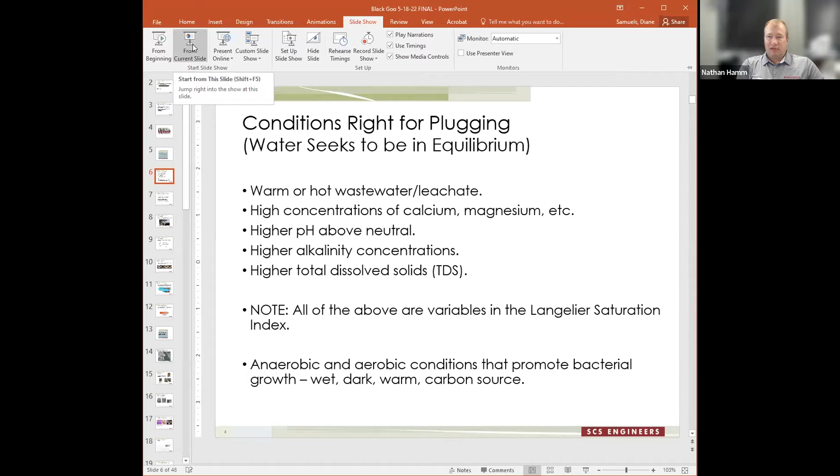So when we talk about pluggage versus relatively clear pipes, wells and pumps, etc., it's really all about the conditions that exist where the deposits occur or don't occur, hopefully not, right? Whatever those conditions are, though, your wastewater is chemically always trying to achieve equilibrium. You're familiar with deposits occurring in some pipes, wells and pumps, etc., and not in others, which pretty much we all are familiar with. Then you know that there's different conditions that exist between where deposits are occurring and when they're not.

So let's just take a fairly simple example at the start here. Think of conditions that exist in a water heater supplied with well water. Well water is being heated. You can have higher concentrations of minerals, your typical calcium, magnesium, iron, etc. Mineral deposits will tend to occur, but not usually any organic deposits in the water heater, right? That's because solubility of calcium decreases with increased temperature. There isn't usually a carbon source in the well water.

So part of talking about conditions needed for deposition to occur is a calculation called the Langelier saturation index, or we call it LSI, which uses wastewater data and can predict if hard scale deposits can occur. And wastewater conditions listed in the first 5 bullets here on the slide are most of what makes up the Langelier saturation index. The next few slides will go into some more detail regarding this.

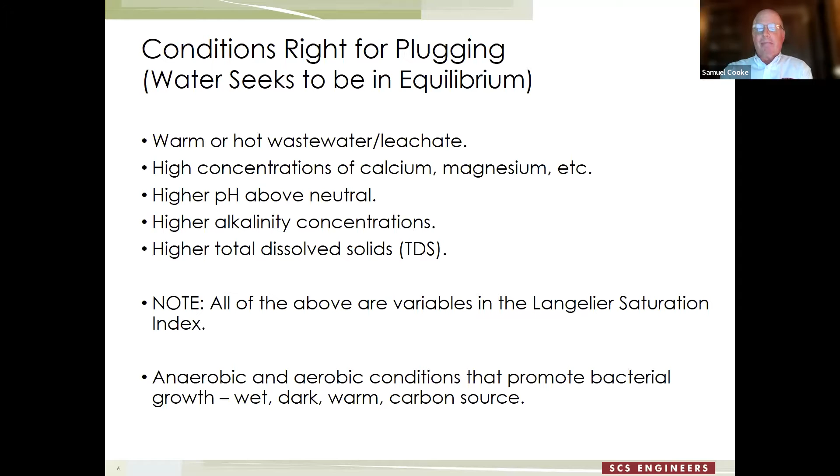So let's assume that the leachate or wastewater that you're managing has some of the conditions that can exist to promote deposits occurring in the pipes and wells and pumps. So based on what we know, based on research, wastewater like landfill leachate has some added components that further promote the deposits forming. Sticky stuff like man-made polymers that can be in landfill leachates and also landfill gas condensates, as well as polymer producing organisms are often associated with black goo deposits that Mark will be talking about.

We know that microbiological growth naturally produces polysaccharides. Want to also point out that landfill leachate and other wastewaters often have ingredients that form inorganic deposits. So we've talked about the calcium carbonate deposits in the water heater, but it can also be something called struvite. That's the magnesium ammonium phosphate.

And all of those constituents, the magnesium, the ammonium, the phosphate, are all typically found in landfill leachate, and under the right conditions, and by right conditions, I'm talking about really the wrong conditions, since we don't want deposition to occur, include all three of those constituents that, by the way, form in an equal molar ratio, 1 to 1 to 1. But calcium carbonate and struvite aren't the only inorganic compounds that can be a problem, because there's also iron and other inorganic compounds that also form deposits.

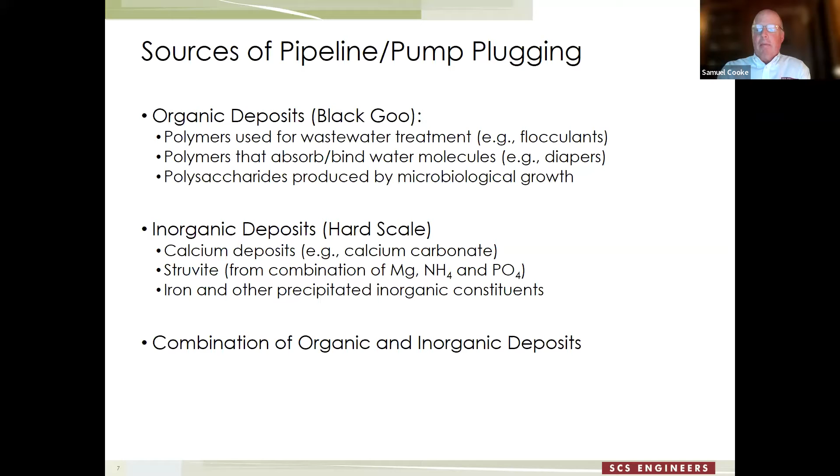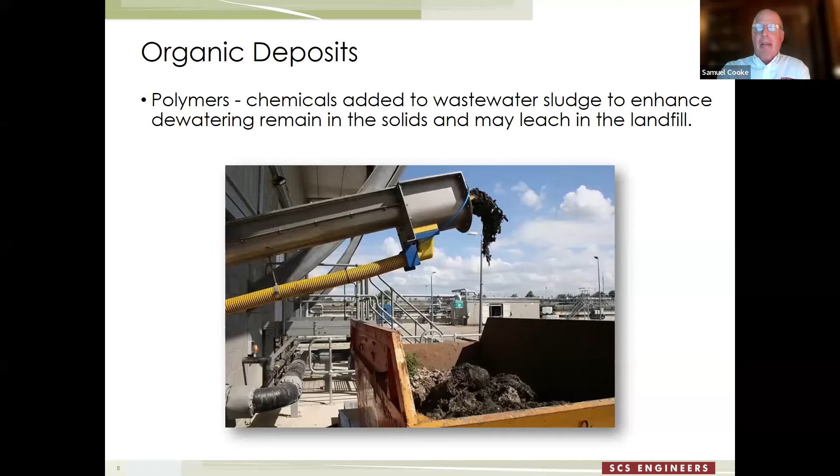Say I'm kind of going back and talking about these wastewater polymers, with the challenges that people are having with emerging contaminants, specifically talking about PFAS, a lot of times those biosolids from wastewater treatment plants have historically been land applied for beneficial use, as a disposal method. But with pending regulations, some states already enacting regulations, others in the process of getting that done and looking at what the federal government might do, it seems that more and more of those materials are going to be coming to the landfills potentially for disposal, further exacerbating that problem.

In your experience, do you need to be taking large amounts of, for example, wastewater biosolids to have issues with this, or can even just smaller quantities create problems with your leachate? Yeah, smaller quantities can definitely. I mean, the more that you have, the more chance that you're going to get those polymers in your leachate. But even at fairly low concentrations, the polymers and of course the polysaccharides that we're going to be talking about next, those tend to build up.

And again, it's all about that equilibrium and about the chemistry of your leachate and the conditions that exist in the pipe. And so you can have a relatively low concentration of one, but you have other factors that make it so that the black goo in the organic case or the inorganic deposits can build up. Again, it's all about conditions, and just a little bit of sludge can exacerbate that. So, good question.

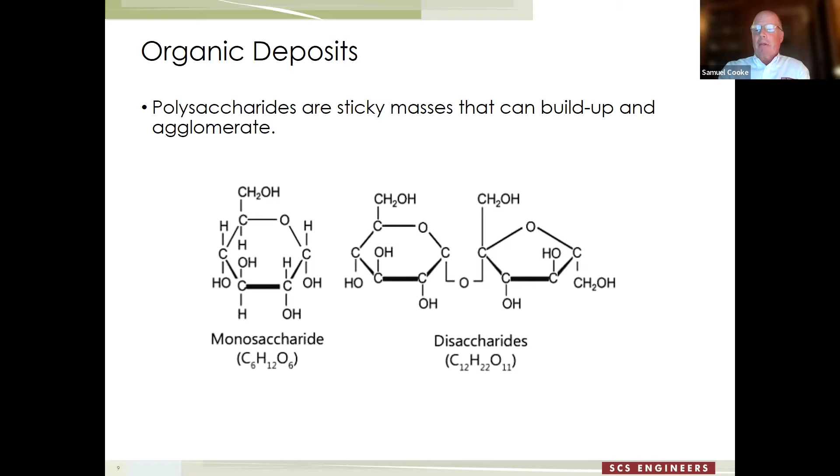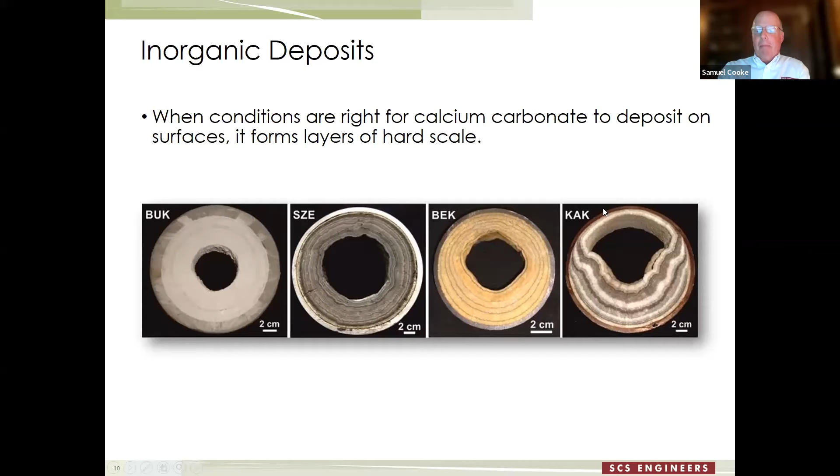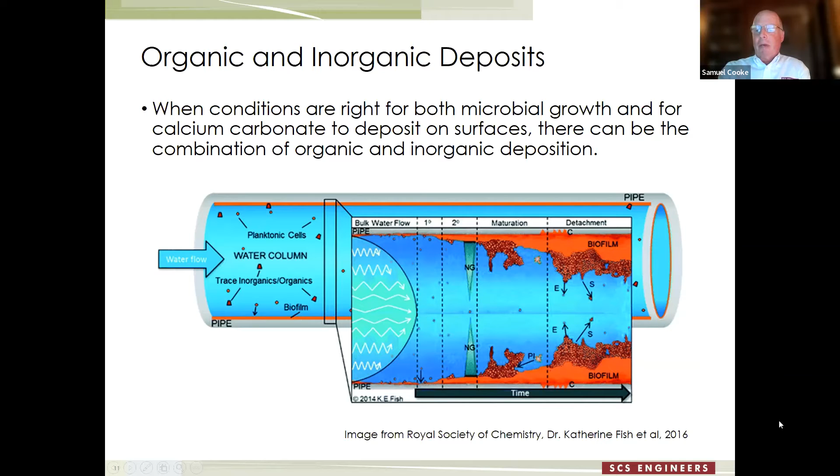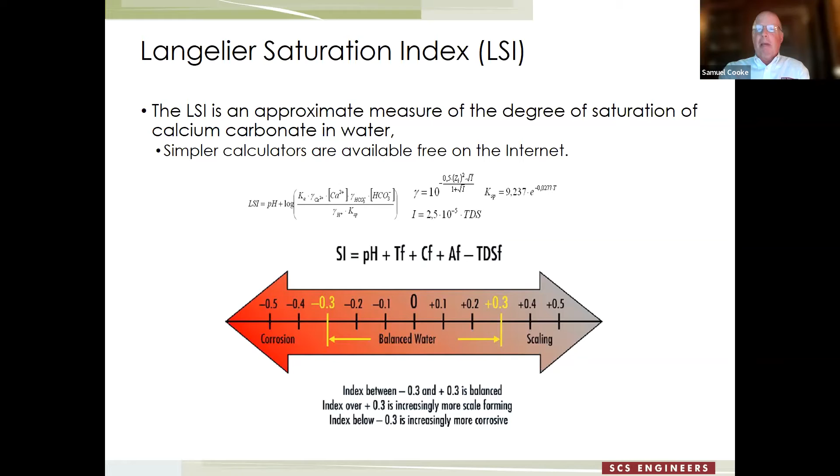Sam, I think it's important to point out that that's really only for that calcium carbonate scale formation, the inorganic scale, right, not for the biological or the black goo type stuff that we'll be talking about later in the presentation. Exactly. Very good.

All right. Thanks, Sam. That's kind of our scientific primer, if you will, of scale formation mechanisms. And that, I think, is a really good lead into a couple of case studies that are going to come up here. So I'm going to turn it over to Marc Lefebvre, who's going to talk about a very challenging inorganic scale site.

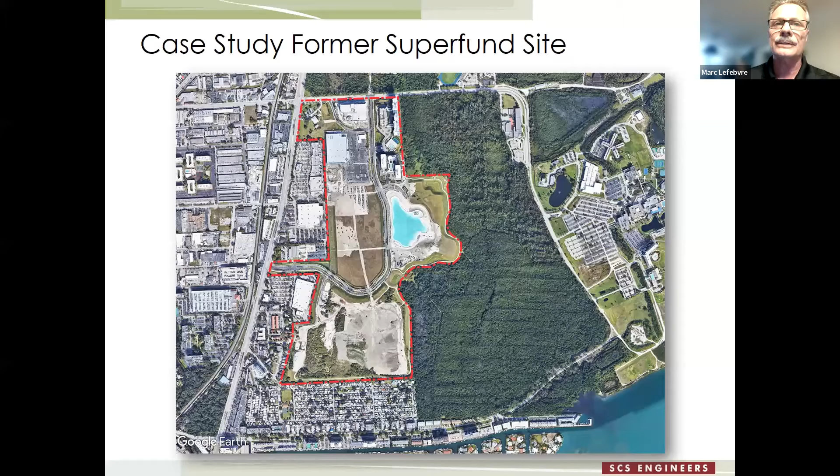We face a number of challenges at this site. There are 32 independently operated extraction wells to recover ammonia in the leachate impacted groundwater, but drawdown in the wells must be controlled so as to not exacerbate chloride concentrations in sensitive wetland areas.

SCS must maintain these wells to operate 24/7, 365 days a year with minimal downtime. Several years ago, scale deposits began to appear and have progressively worsened, causing some of these wells to be inoperable for extended or even indefinite periods of time.

Standard practice in many landfills is to conduct acid cleaning and jetting to remove scale deposits. We have performed this periodically at the site, but the scale comes back very quickly and is difficult to perform due to small diameter piping and few cleanouts.

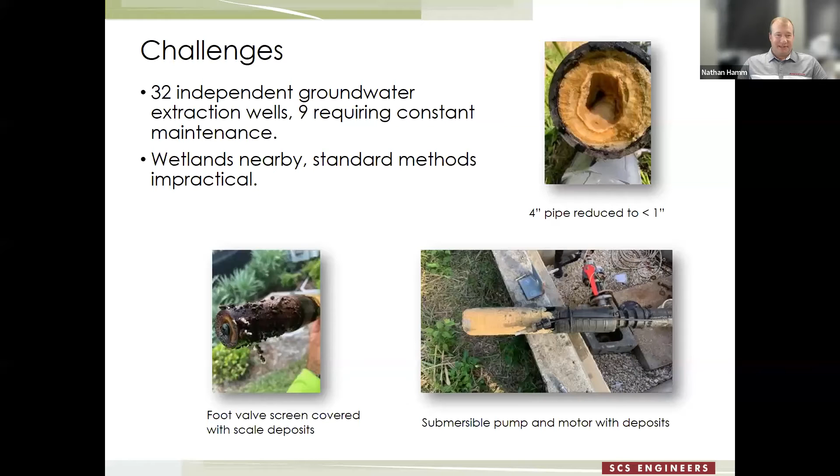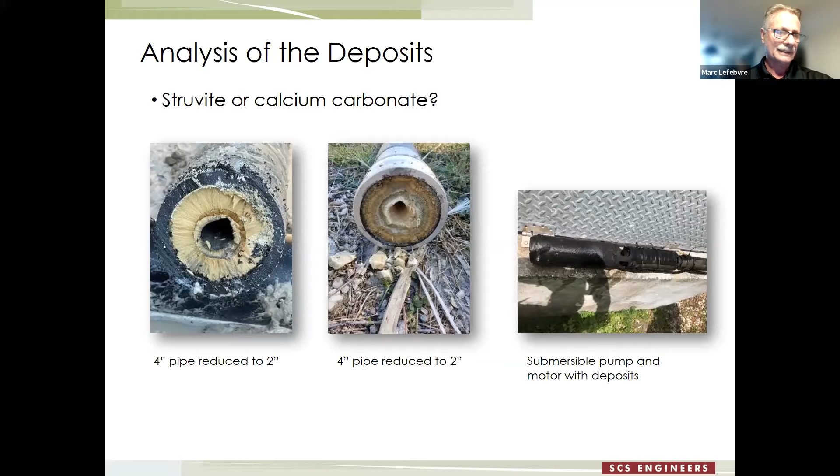In order to tackle the problem, we need to find out what these deposits actually were. There was conjecture early on that it was struvite, which is magnesium ammonium phosphate, as Sam mentioned earlier. Or were they calcite, which is calcium carbonate? Deposit samples were collected from all the scaling wells and analyzed by polarized light microscopy. When we received the results, the samples indicated they were calcite with a trace of quartz present.

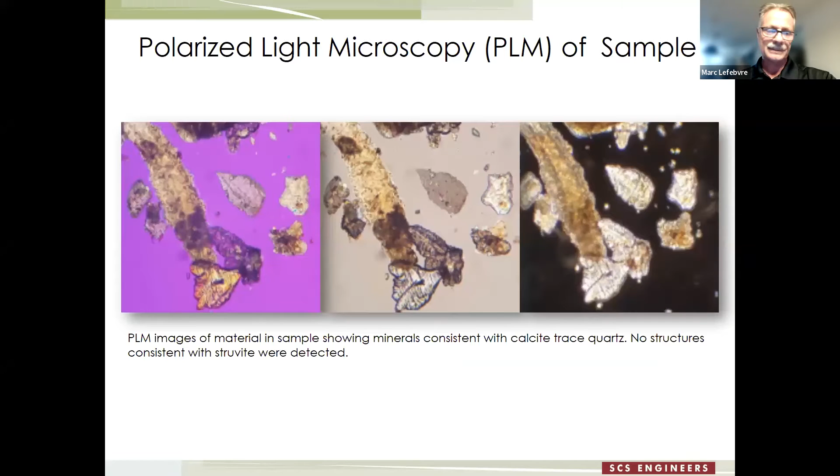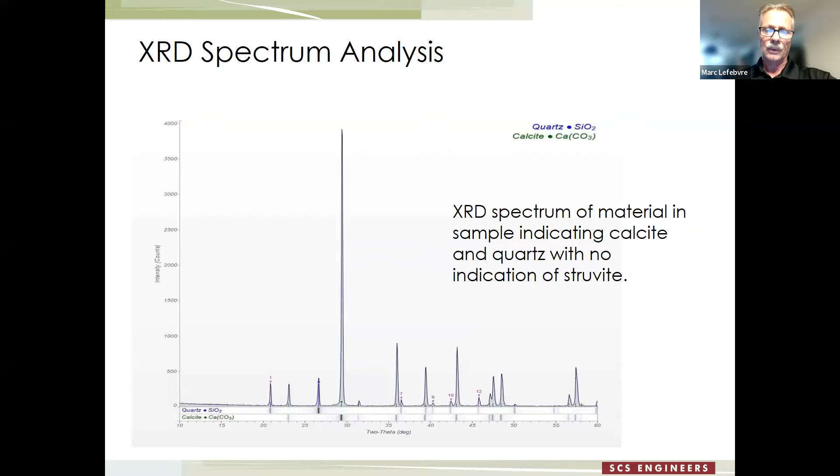This was further confirmed by X-ray diffraction, which also indicated quartz and calcite, but predominantly calcite. We also collected water samples to measure the scaling potential using the Langelier index, as Sam discussed earlier, at wells that both had severe deposits and no deposits.

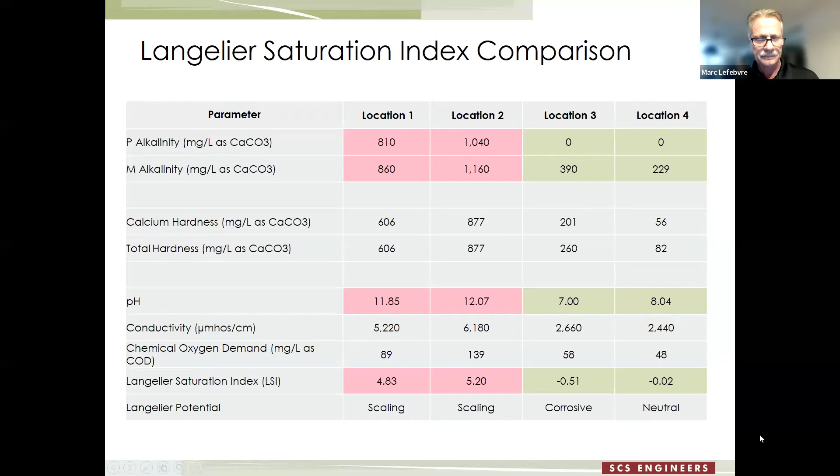So why were things changing out here all of a sudden over several years? All of the extraction wells were through waste, but only 9 of them have scaling problems. So what is buried here is the question. Looking at historical aerial photos, some of the lakes were filled with crushed concrete. That would explain the high alkalinity and pH at some locations.

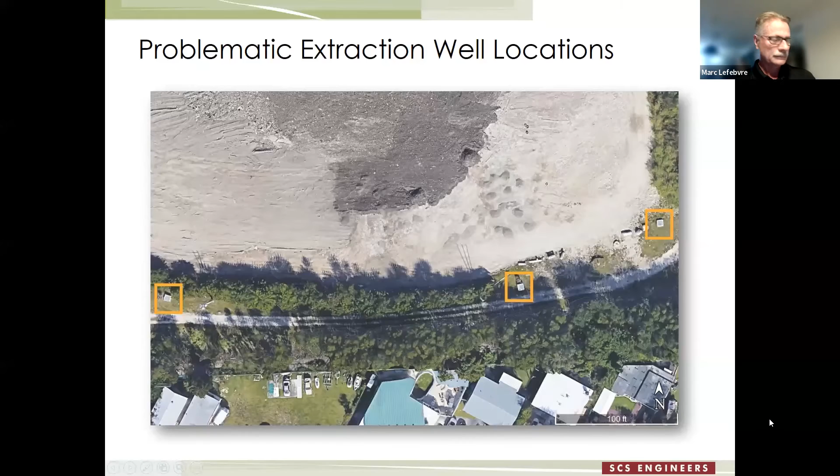Since we tried acid cleaning and jetting with limited success, we embarked on pilot testing some potential proactive technologies to prevent scale. The criteria for success was as follows. It needed to prevent scale on the well screen. It needed to maintain system pressure. It needed to maintain well drawdown and flow rate, and it needed to be cost effective and sustainable.

We have attempted to use other types of pumps out here. These particular submersible pumps are difficult to remove for maintenance. So we did try using some surface mounted pumps that are easy to maintain and relatively easy to monitor any scale buildup. So we have two different types of pumps at this site.

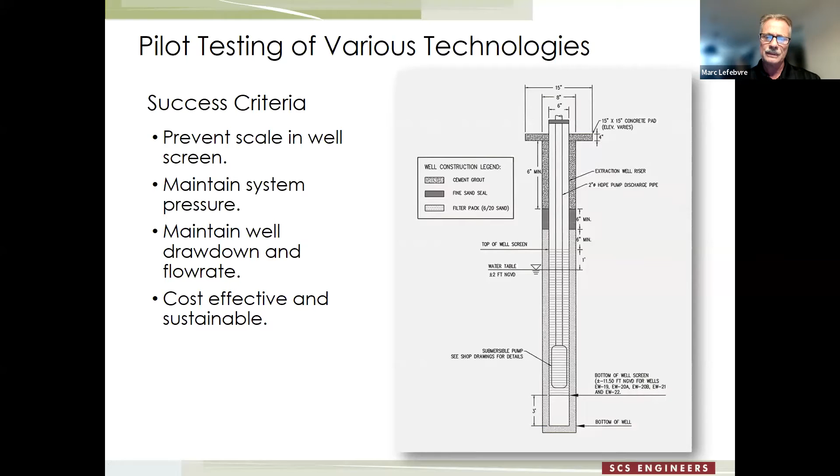The first pilot test we conducted, we'll call the EM device. Pads were applied to the pump and piping down the well to produce a magnetic field around these features. This testing was performed over the course of 1 year due to scale blockage downstream. When scale was produced on the pump, piping, or well screen, the pads were repositioned and additional pads were later added. A Gauss meter was used to confirm the presence of the magnetic field.

It appeared based upon our testing over the 1 year period that the treatment was effective at preventing scale at the pump intake, but the magnetic field radius of influence was not great enough to prevent scale in the well or in the downstream piping. Many more additional pads may have worked, but that option was deemed cost prohibitive. It was our collective opinion that this was not a good fit for this extreme case of scale, so we discontinued the testing.

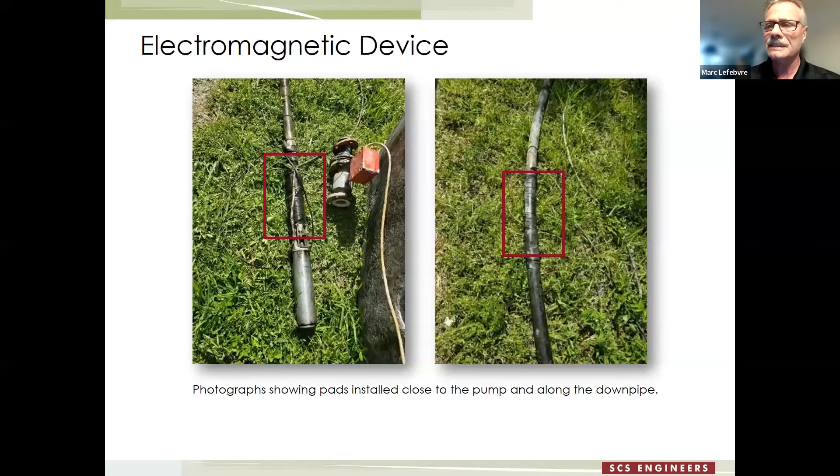The next pilot test we attempted to use was the electrolytic system, we'll call it that. This was a proprietary technology and the second pilot test conducted. An initial chemical treatment was applied to the extraction well using a weak acid and oxidizer to stabilize the well. A continuous low amperage DC current was applied to an electrolytic flow cell to ultimately change the water chemistry and to modify the charge on the ions that produce scale.

Multiple iterations using different metals and multiple flow cells were conducted over the course of a 4-month period. Even after all these iterations, extreme scale deposits continued to appear on the foot valve of the pump and on the well screen. Based upon these results, this technology was deemed ineffective for the extreme conditions of this site, and this testing was also discontinued.

The next pilot test involved chemical treatment. We used a conventional scale inhibitor for prevention of scale in heat exchangers or condensers, and it was tested over a 4-month period in a heavily scaling well. The dosage of chemical was based upon the stoichiometry and concentration of scale-producing ions in the groundwater.

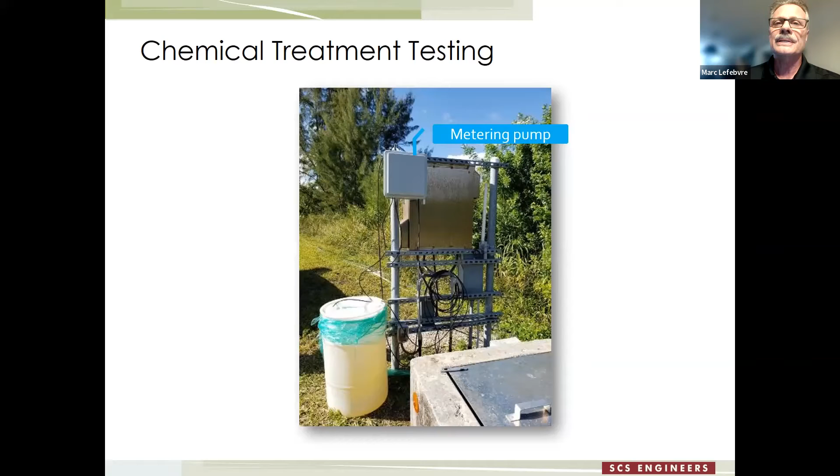The results indicated that the scale was not prevented, but the composition of the scale was changed from a hard rock-like material to a soft sandy consistency that could be brushed off relatively easily. The volume of soft material was still great and would still need to be removed from the pump and piping, so this was also deemed unsuccessful.

Currently, we are conducting the fourth pilot test, and this is a proprietary chemical formulation. It's a well-specific formulated scale inhibitor, and it's being tested in one of our most challenging wells. This testing began about 2 weeks ago. Preliminary indications are that no scale is formed in the well, pump, or piping after 2 weeks, and all the criteria that I mentioned earlier are being met for pilot studies. SCS will be providing updates on this testing, and the final outcome will be available on our blog.

So Mark, you show a picture of some above ground hose there. Why above ground hose? You kind of referred to that earlier. Yes, we have HDPE piping throughout the entire site, but this particular one is in a section of the property that has very extreme scaling. This is the area where we're doing our pilot testing right now, and that pipe is plugged solid.

We've tried to acid clean that and jet that to no avail. We really don't have enough clean outs. I can only imagine the piping must be hundreds and hundreds of feet with maybe less than an inch of clearance through there.

So what we did is we installed this hose as a bypass, and that bypass allows us to also monitor the effectiveness of our pilot test, because we can disconnect sections of this pipe, which are connected in 50-foot sections with cam locks, and we literally observe the interior of the pipe and see what kind of deposits are present. We can even step on the pipe to see if it's crunchy, if anything's developing there. So this was kind of an alternative to excavating that HDPE and replacing it. So it's worked out really well as far as evaluating some of these technologies.

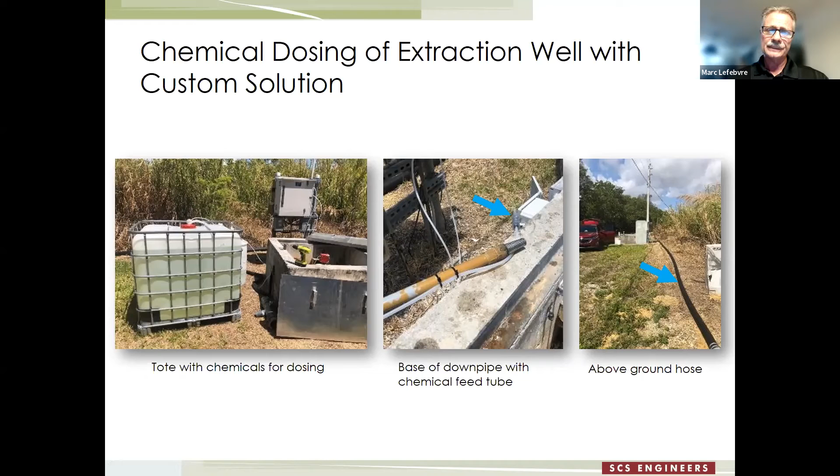That's exactly what I saw. I like to see about 250 feet per clean out. Makes it a lot easier to troubleshoot, video, inspect, and maintain. It just works out a lot better that way. It would be nice to put those in during the development of the landfill. It's sometimes much more difficult to retrofit that, as we experienced at this particular site, if that's possible.

So if this final fourth test that we're testing right now doesn't pan out, we have some additional potential options I'm going to mention. One of them that we've discussed is injection of an inhibited acid such as sulfuric, for example, for pH and alkalinity reduction. Some of the concerns associated with handling an acid like that would be attacking metals in the system, undesirable gas generation from reaction with different types of products that have deposited in the piping, formation of undesirable products directly like gypsum, which is calcium sulfate, potential public access issues, and health and safety concerns.

Another candidate study that we've also partially embarked on is relocation of candidate extraction wells to locations with favorable Langelier indices. This particular option would require groundwater modeling to ensure no adverse drawdown effects to sensitive wetlands and still effectively capture the ammonia that we're tasked with doing. As a note, we have done some preliminary testing of alternative locations already, and some of these look promising based on the groundwater samples we collected for Langelier indices. But in general terms, for this particular site, the farther away we are from the buried concrete, the better.

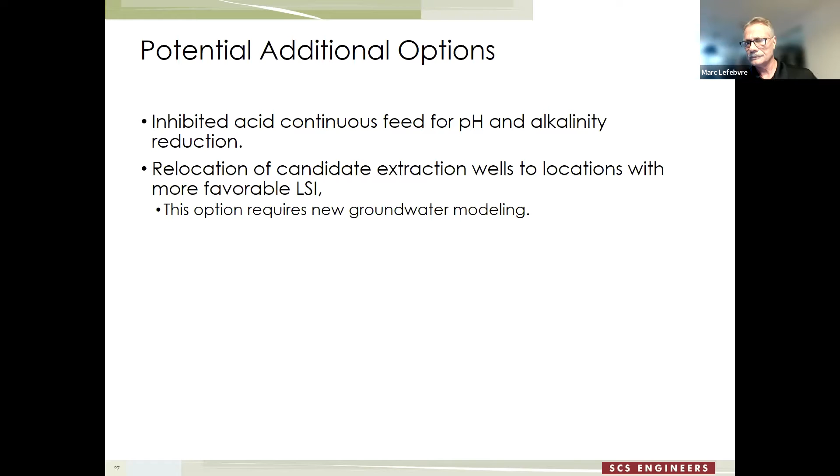Thanks, Mark. Hey, we've got a couple of questions up here, and I'm going to maybe ask those. We'll take kind of a quick break here to answer these questions before we move on. One of the questions I'm seeing here is, are you seeing benefits further down the line with acid introduction? And I don't know who's best to take that one on. Maybe Sam, your thoughts on acid introduction and its benefit as you move down the line.

So first of all, I would be very careful about making the decision about that, given the health and safety concerns that Mark mentioned. I've been to the site with Mark, and with public access, with the degree of buildup that occurs in the hoses and the pipe, and the amount of reaction that would occur with the calcium carbonate, because it's an exothermic reaction. There's a lot of foaming and fizzing going on there. So you have to take all that into account.

But like we said, if you're dealing with inorganics, the Langelier saturation index, the first variable there is pH. So the lower the pH, the lower the Langelier. There's also the alkalinity. So acid is going to help you out in those situations. And then it also oxidizes organic material. So there would be an effect. I guess the key thing that you're going to get out of this entire presentation is that every site is different. Every deposition issue is going to take a certain approach that will probably be more successful than other approaches. And acid is definitely one of the approaches. Okay, I think maybe that answers that question.

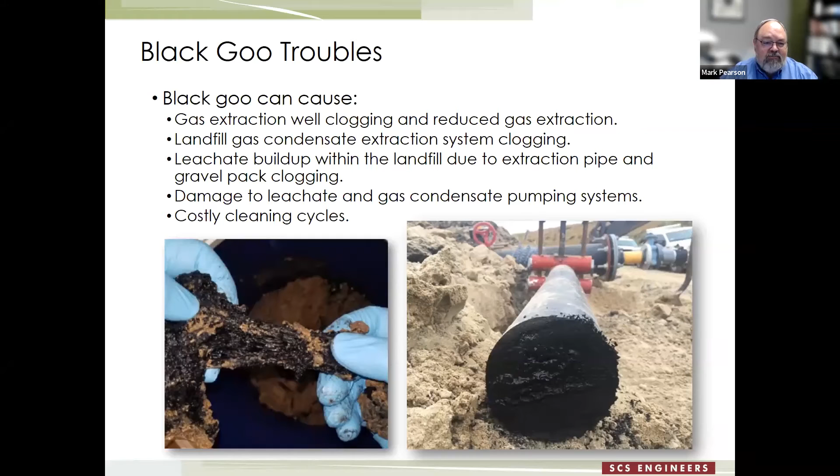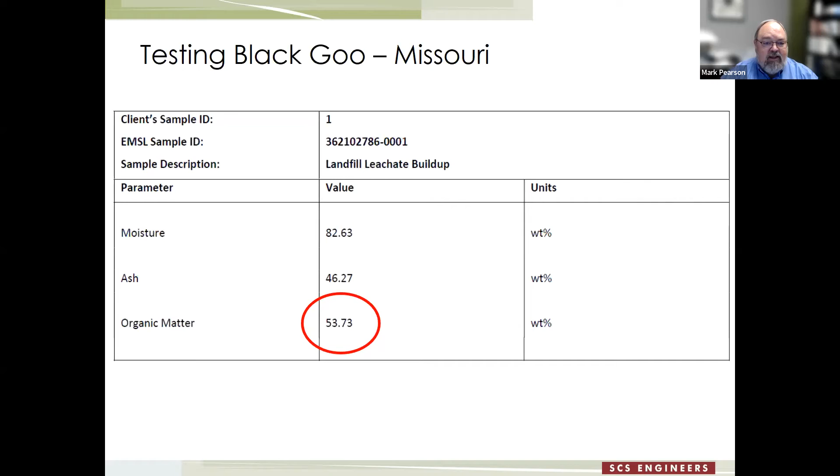So what is this stuff? We took our sample in southern Missouri to the lab and found that it was a majority organic matter, which sort of corresponds to what Sam was discussing about the polysaccharides and the infestation of microorganisms that produce this gelatinous formation that helps to plug up all our piping and underdrains.

And with the methods that have been utilized to remove this material, if you don't have access to places, it makes it really hard. And if you only have one tank, for example, like a frac tank or an enclosed tank, and it gets clogged up with material, then it's hard to take it offline long enough to get the material out of there. Furthermore, we have a lot of pipelines that are affected, force mains and such.

And certainly you can go in with a jet or a cutter. You may be limited in reach, and you may have to cut in more access points to be able to physically get at it. But the reality is, if this material has grown into your gravel pack under your landfill, you're going to have a very hard time removing that with a mechanical cleaning regimen.

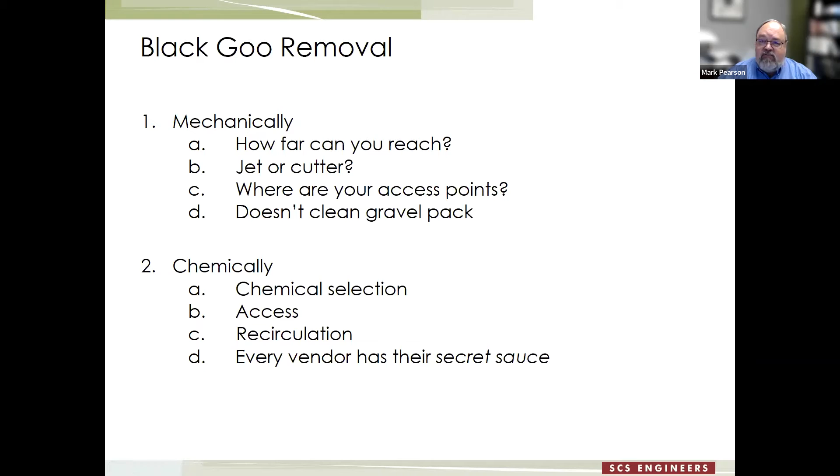Chemically, you can take your samples of material to people and see if they can find something that would help attack this and loosen it up. Again, you need access to apply chemicals. You need to be able to recirculate the chemicals, because with one pass, a lot of times the chemicals don't have time to react with the product, loosen it and then let it go. Every vendor has their secret sauce. So how do you figure out what to do?

We took samples of the black goo at our southern Missouri landfill and tried some materials that were on hand as a first order testing regimen. We had some proprietary material that seemed to liquefy the black goo. We tried low dose hydrogen peroxide, and that seemed to make quite a reaction. At that dosage, we didn't see a lot of reduction, but we could tell there was something going on there. Simple Green we had on the shelf, and we didn't see much of a reaction.

And we had a cleaning dose of muriatic acid. Again, we saw some reaction there, but our concentrations weren't all that high. But we've seen a lot of municipalities and clients send samples to labs, have them perform testing and come back with proposals based on that, having a competition that may be economic to begin with, but also to see how efficacious it may be, to help come up with a decision.

So what was interesting, Mark, at that site, looking at those samples, you had oxidants and acids that worked to some extent there. Some of those may be attacking the inorganic. For example, the acids may be more effective at attacking the inorganic than the organic portions, while the oxidants may be the opposite.

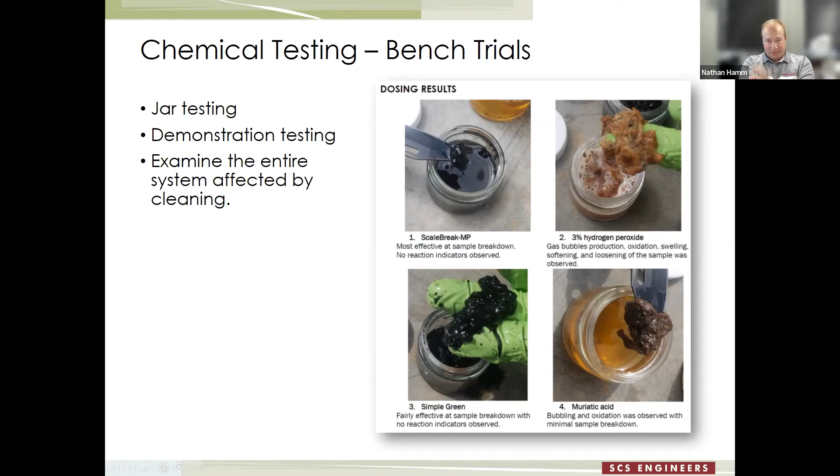When it comes to chemical cleaning, if you embark upon a program of cleaning your force mains or your underdrain systems with chemicals, it's probably a good idea to have the professionals do that as opposed to trying to provide all the safety measures that are associated with getting your person up to speed. And recognize that you have to employ system thinking in a cleaning protocol. For example, you're going to be releasing a lot of pent-up leachate that may be there because you can't get it out of your landfill.

It's been accumulated. So if you go and get your pipelines clean, now you have this rush of liquid, but you haven't cleaned out your tanks yet. So you might want to employ some system thinking in that regard. That and material compatibility. You may have valves that have gaskets or seals, and pumps and piping materials, maybe air relief valves, for example, that may have materials that would be affected by the acids or the hydrogen peroxide or other chemicals that might be utilized. So you might ask your chemical suppliers to take those things into account, or proactively replace valves in a cycle so that you're in a better position to routinely perform this kind of activity.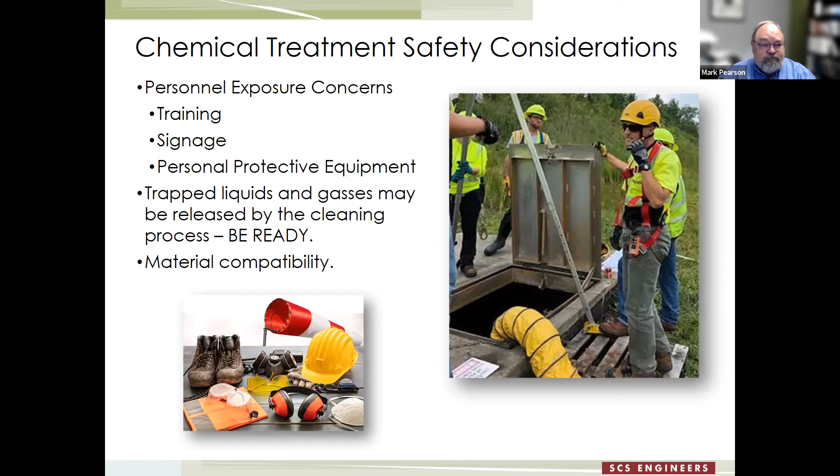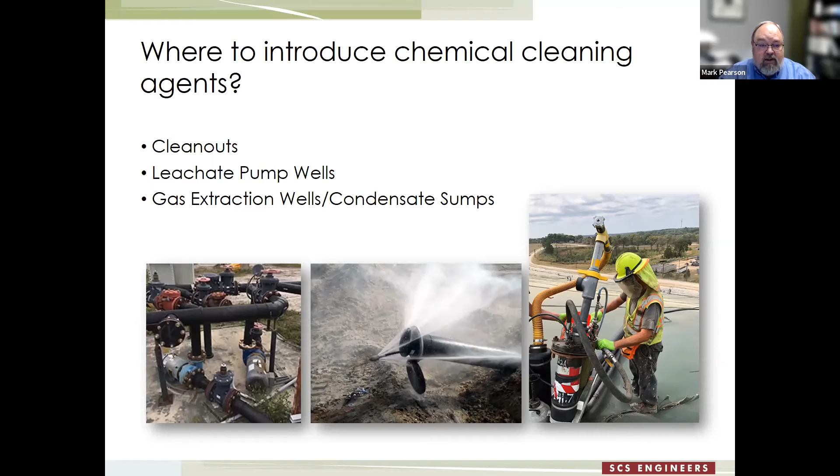Where do you introduce this stuff? You probably have limited spots. You might have cleanouts or leachate pumping entrances, access. You have your gas extraction wells and some pumping facilities for your leachate management. These are all opportunities, but you'll need to think about how you get this material in and out of your landfill systems. I think, proactively, we need to be thinking about that more as we see this occurring at more and more sites and becoming a more common problem. We definitely need to be thinking, from a chemical standpoint and a cleanout standpoint, about more cleanouts, more access points, those kinds of things that provide you options.

There are some landfills where you may only have access at one end to your entire perforated collection system. That makes it very difficult when you're at the downstream end trying to introduce chemicals to the far end of a line to clean it. It really limits your options. And the ability to get into the underdrain system. We found that sometimes you have carbonate and non-carbonate materials in your underdrain, and if you dose a lot of acid in there, you may actually be dissolving your underdrain gravel system. So that's something to keep in mind as well.

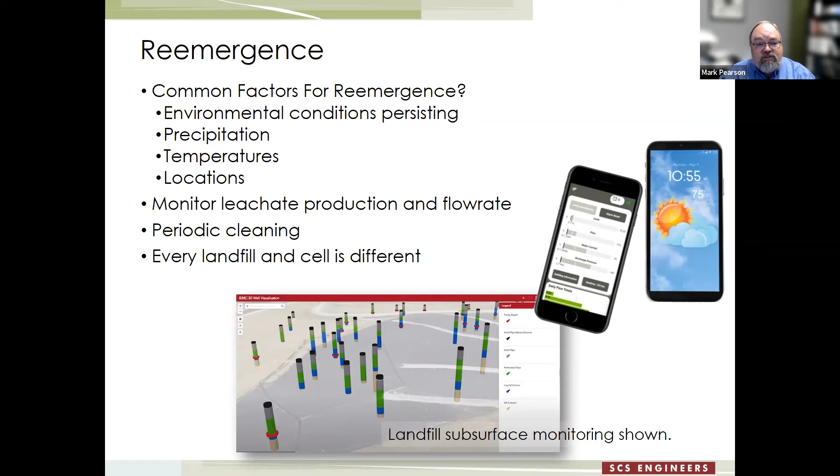I would suggest that if you're planning on doing improvements or adding a cell, that you discuss this not only with your maintenance people, but also with your chemical cleaning vendors, and they can give you suggestions on how to create a recirculation system that will be effective in keeping your lines clean, and maybe have a method of going to different layers within your landfill to perform monitoring and cleaning activities. So it's really a holistic approach for handling your black goo infestation.

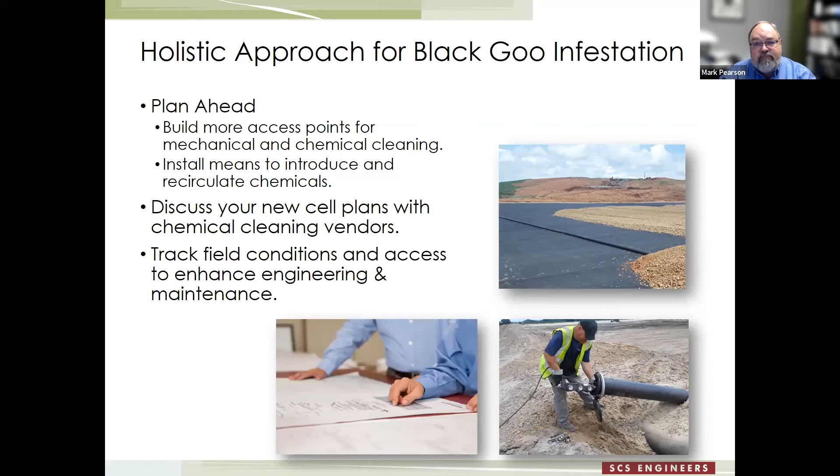All right, I got a couple of questions I'm going to ask here quick before we move on to our last section. Somebody asked, have you seen evidence of occlusion on gabion boxes or baskets sitting above the drainage layer material? Can this goo block very large gabion box intakes? So kind of like a window, if you will, down into the leachate drainage layer. Brian, is that something that you've seen specifically at any of the sites you're working on? No, it's nothing that I've seen.

Yeah, from my perspective, can it happen? Yeah, I would describe this black goo material as kind of sneaky, if you will. It can be in there growing slowly over time, and it can go undetected for a long time until you have some major problems. You don't know you have the issue until you've got major leachate buildup and leachate coming out somewhere it shouldn't be, or you've got a completely blocked pipe and you notice, hey, I've got no leachate flow out of this cell, which makes no sense. Places like that where it's shown up.

But I personally don't have any experience with the gabion baskets and whether or not it's actually formed there that I'm aware of. Anybody else on the panel that's experienced that? I think my sense is that a lot of this is happening in areas where there is low flow and where microorganisms are wanting to hang on to something so that they can get to a food source readily. I'm not sure that areas where there's a lot of openings for flow to go through are going to be seeing that kind of blockage.

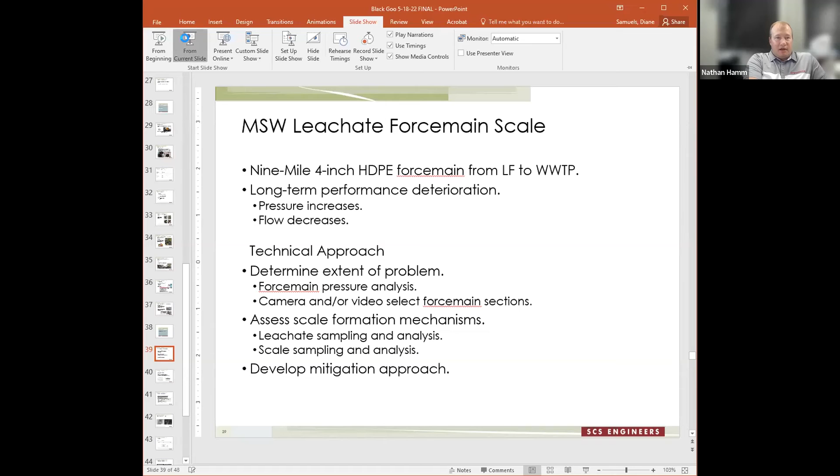In this section, I'm going to cover a combined organic, inorganic site. It's actually the same site that Mark was talking about, but a different part of the facility. At this facility, they've got a 9-mile, 4-inch HDPE force main that's taking leachate from a lagoon at the landfill to the wastewater treatment plant. That entire 9 miles is dedicated only to the landfill, so there's no interferences or other wastewaters coming into it.

After they constructed that force main, it operated great for about 6 years. And then at that point, they started seeing some performance deterioration in the form of pressure increases, which were leading to flow decreases from the pumps out there. Ultimately, it got to the point where they couldn't pump anymore.

And that became crisis mode, if you will. This facility handles about 17 to 20 million gallons of leachate a year. So when they're no longer able to pump it to the wastewater treatment plant, it was kind of an all hands on deck, getting trucking lined up and other ways to manage that, which I know others that manage landfills have been in those kind of situations. It's not a fun place to be.

So our initial technical approach was, number one, trying to determine the extent of the problem. When we first started, we didn't know if we just had a break in the force main somewhere or something got pinched. That area is prone to sinkholes and those kind of things that can cause major structural damage to it. So part of doing that was trying to figure out what we were dealing with. We did some pressure analysis, and we also did some camera and video at select portions where we had access to the force main to look at things.

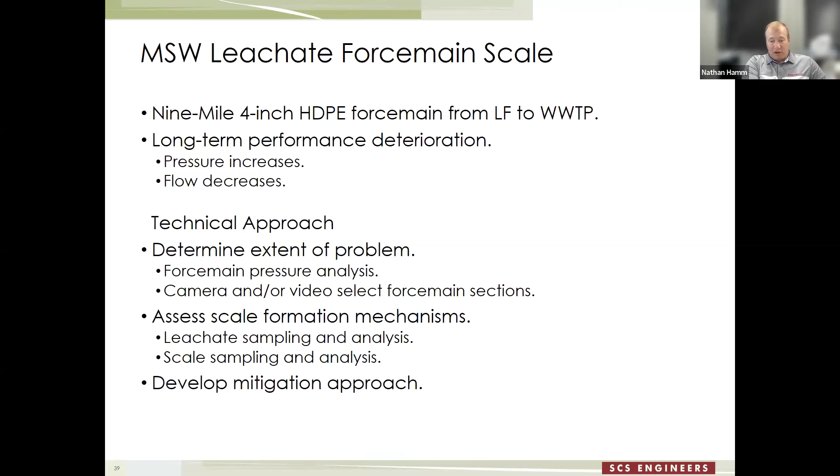Through that, we found out we did have some scale issues there. So we collected samples of that scale. I'll talk a little bit about the leachate and scale sampling that we did and what that showed us. And then obviously trying to solve the problem, get them back up and running as quick as we could.

We collected some leachate samples, just kind of looking at that. And we had high TDS, dissolved metals, TDS around 3,000 milligrams per liter. Your typical stuff that you see, lots of metals, calcium, iron, magnesium, sodium. Did the Langelier index testing, which showed we had some scaling potential, but it's not super high. It was high, but nothing like what Mark was seeing at the facility he was talking about there, primarily for calcite and siderite.

One of the things that was interesting at this landfill, it has both lined and unlined areas. And the leachate that's collected from the unlined areas tends to be quite a bit weaker than from the lined areas, which is intuitive. There's more stormwater intrusion and those kind of things into that leachate. But as this facility has been built out and more cells are added, obviously the contribution coming from the lined areas is becoming a larger percentage of the overall generation.

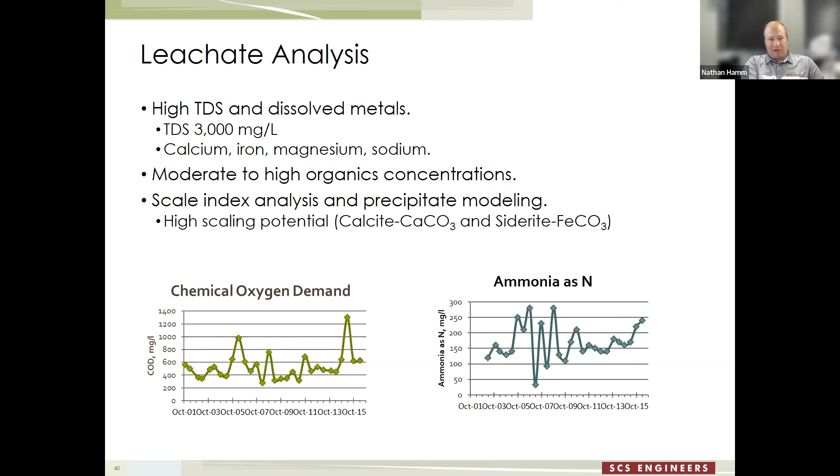I mentioned us trying to figure out where in the 9 miles we were having our issues. What we did is we had access points. There were some intermediate high points along the force main where we had air relief valves in there. We took those air relief valves off. We installed pressure transducers at each one of those locations that we could link and sync up time-wise. And then we would operate the pump at the main pump station and see what kind of pressure response we got. We expected, well, maybe we'll find a blockage somewhere when we don't have any response downstream.

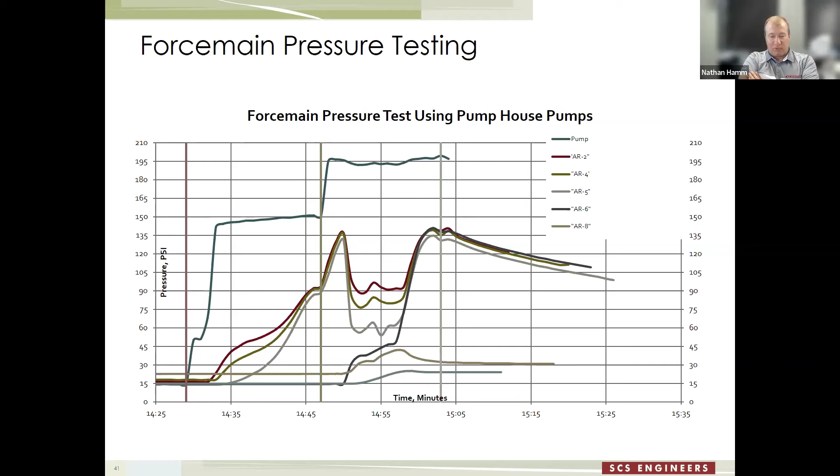We ended up having scale issues kind of throughout. It was definitely more pronounced towards the front end of the force main than the back end. But this approach was kind of one of the ways we were looking at trying to narrow down where the problem was.

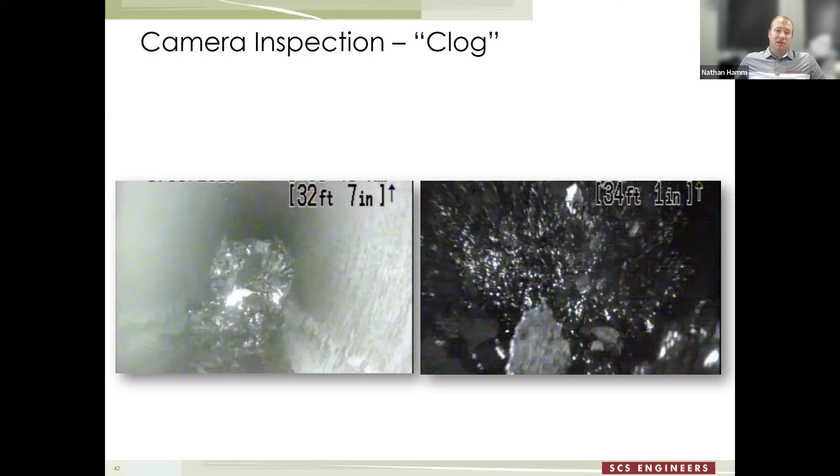I mentioned we also use cameras. This is a camera video on the left-hand side. This is showing one of the plugs, if you will, where we had this scale that was sloughing off the walls of the pipe and then accumulating in kind of low points and spots where there's stagnation in the force main. And the right-hand side just shows a little bit closer. The camera was closer to it, and you can kind of see the little chip materials here. And I've got some pictures a little bit later on that I'll show you a little better picture of the scale itself.

The scale testing that we did was interesting. We expected initially that we were going to see typical calcium carbonate scale. In this case, we actually had 40 to 50% iron oxides with some calcium carbonate, and then also organics. I would say this is a good example of what we think is going on. It's a biologically mediated inorganic scale.

So what we think is happening is that we've got iron reducing bacteria that adhere to the walls of the pipe. They utilize the iron, and as they reduce it, that iron goes from being soluble in the water to being insoluble, and then kind of collects in that biological matrix of the bacteria. And then over time, that kind of hardens on the sides, creates this combined biological and inorganic scale material there that sloughs off when we've got higher velocities in the pipeline.

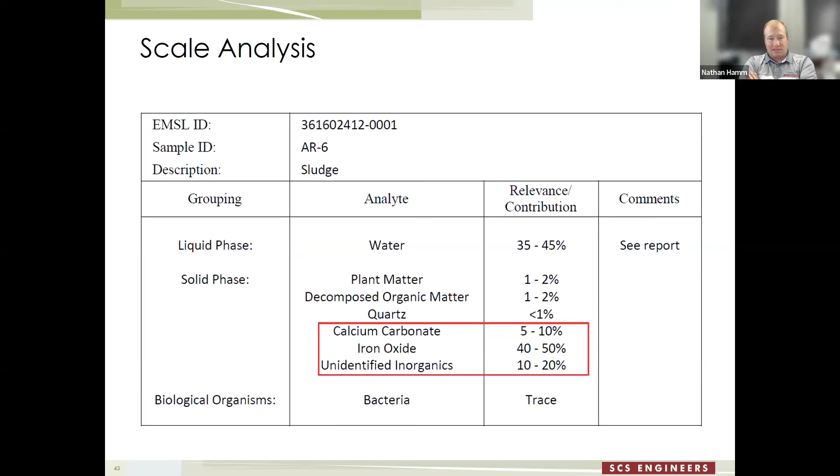In this case, we looked at doing chemical treatment, but with 9 miles of pipe, that got to be kind of cost prohibitive. And we were looking at mechanical and jetting. Again, for that much pipe is tough. We ended up landing on pigging, and it's worked very well out there. So pigging, you push these pigs through the pipeline to essentially scrape or scour the stuff off the edges and push it out and remove it from the force main.

So we would break the force main up into sections. And when I say break, we would use existing cleanouts or locations where we had access to it. We'd introduce the pig at one end. You use water to essentially push the pig through, and you have a vacuum truck on the back end where you're sucking and removing that material. So eventually your pig will actually show up into that vacuum truck or into your catcher. We had a pig catcher that we designed for this.

When you use HDPE and you've got welds, you end up with what I would call squeeze out at each one of the joints. So you've got this little lip of material on the inside, so your diameter doesn't stay consistent. And those squeeze outs can be really pronounced when you get to fittings, going into, for example, a clean out or a valve or an access location, where you might have started out with a 4-inch pipe, but you've actually got only 2 inches of open area. We had trouble with those pigs getting caught in those areas. And so we didn't use them very long, I'll put it that way.

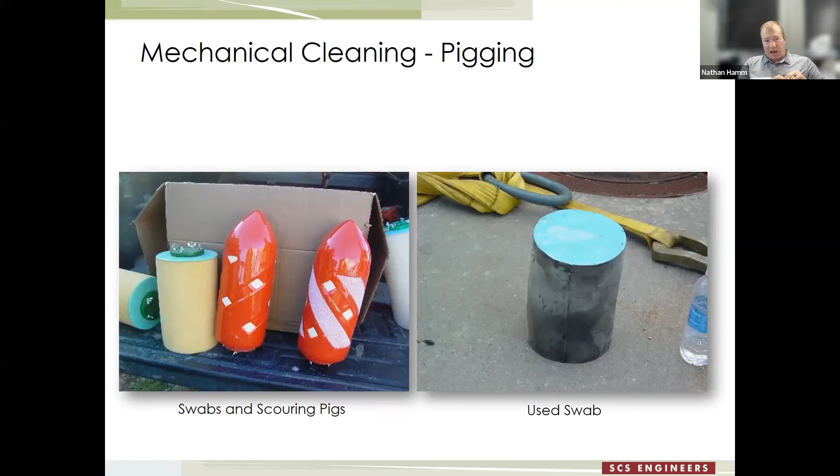On the right-hand side, you see one of those used swabs. The squishier, softer ones did a really good job of cleaning, and we didn't have the problems that we had with the hard ones. And that's what we've used from there on out.

But with 9 miles of pipe and intermittent pumping, you're not pumping all the time. So you get something suspended and moving down the pipeline, you're going to shut off for a couple of hours or wait for it to rebound before we start pumping again. That stuff will settle out onto the bottom of the pipe and definitely collect in low areas. And what we found then is that we weren't getting a high enough velocity at that point to resuspend and move that stuff down.

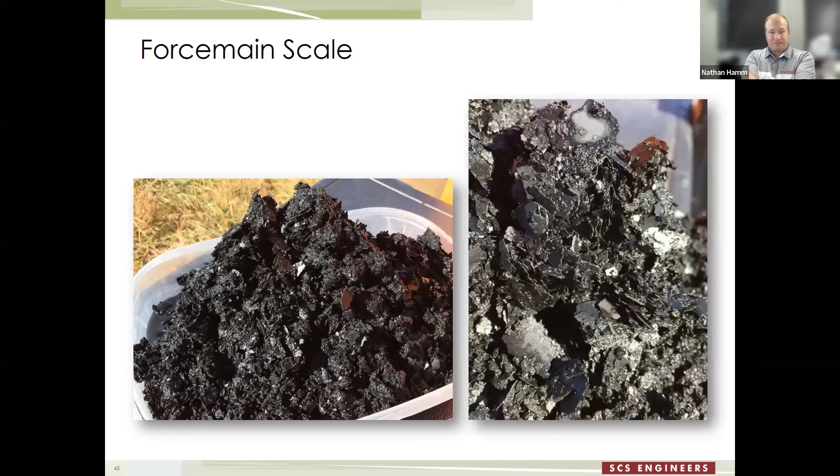And so this stuff, while it was forming all along the pipeline, would eventually get to low spots where it would build up, cement together a little more, and eventually create blockages. This stuff is really interesting too with the iron component in it. It would come out black like that, but within a number of hours, definitely by the next day, that stuff would turn to a red rusty color as it oxidized.

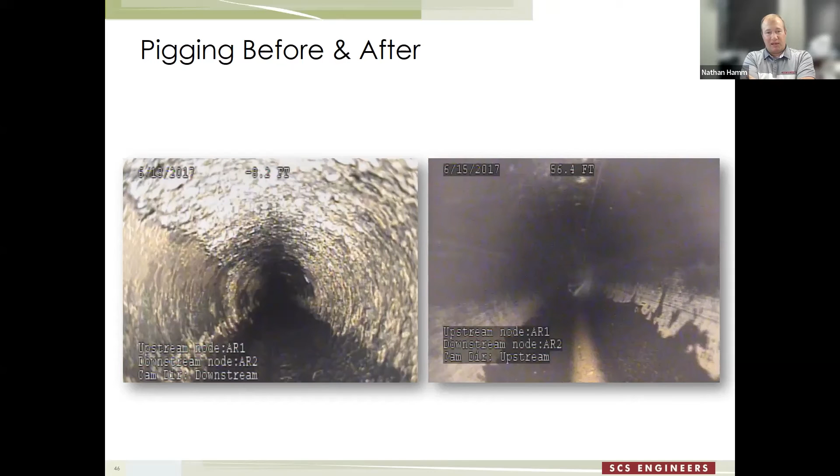We'd have to be careful about how long of a section we would do, because depending on how much is built up, you're pushing all that stuff like a bulldozer in front of that pig, and eventually you will get that pig stuck if you try to go too far with it. So that was kind of a trial and error part of it.

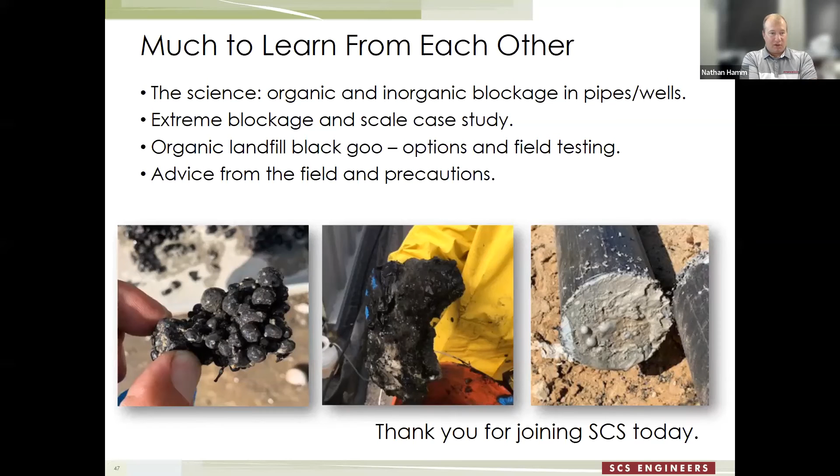There's a lot we can learn from each other about it. Inorganic, organic, you need to really test your scale specifically, find out what it is, how it's forming, and that leads to clues to what's going to be the best approach, chemically or physically, to clean it up and get you back and running.

I'd asked, what diameter pipe was that, Nathan, that you were showing a minute ago? And do you have a recommended minimum diameter to really do an effective job with the cleaning? So that was a 4-inch SDR 17 pipe. We actually had one section near the pump that was SDR 9. That's a little bit smaller inside diameter, because the wall gets thicker as your SDR rating goes down. I wouldn't go with less than 4-inch. If you want to have any real way of accessing it and cleaning it, it's the bare minimum.

We were limited to push cameras in that small diameter of pipe, so we could only see about a couple hundred feet upstream or downstream of any place we were looking. If you've got a 6-inch pipe, you can use crawler cameras that can go further to observe more of the piping. In this leachate piping, it's really tough to see anything with a camera if it's full of leachate. Leachate's typically dark, so you would have to be in areas where either we'd flushed it with clean water or where it'd gone dry.

Because the force main itself here, you'd go up a couple hundred feet from the pump station, and then the general trend to the wastewater treatment plant was down. There were definitely intermediate highs and lows, but when the pumping shuts down, a portion of that force main drains as those air release valves open up and let air into the pipeline. That also was maybe part of the scale formation, where it would dry out, and that stuff would die and slough off the edges of the pipe.